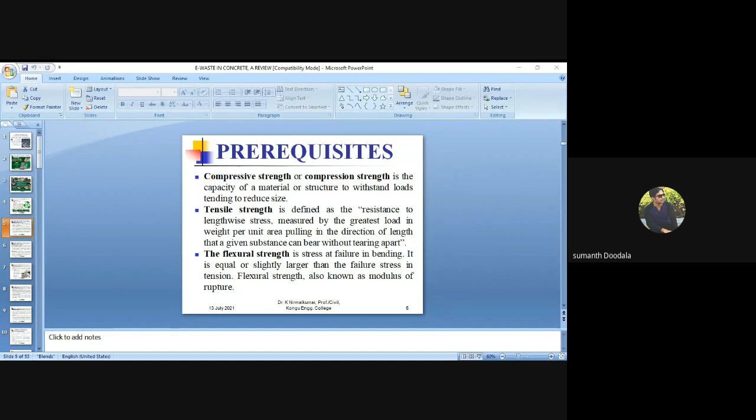Let me ask you a simple question: is concrete a brittle material or a ductile material? Anybody? Brittle, sir. Brittle material.

One more small thing, sir: whether the failure of concrete is sudden or takes place in a gradual mode? We can have some interaction so that it will be easy and lively. How about the failure of a concrete structure, sir? Sudden, in case of plain cement concrete, PCC.

Okay sir, then in RCC it takes time, gradual. And I know the reason why in PCC it is sudden and in RCC it takes some time - it's because of the tensile strength of the concrete, which is weak.

Which is imparting the tensile strength to the concrete, sir? I think one of the participants has given the answer. Let me share it to have some interaction - I'll stop presenting for a moment.

In concrete, as told, PCC will not be having the reinforcement bar, and it immediately fails. Even in this flexural strength test, when conducted without RCC, the failure will be sudden. Whereas if you take the RCC beam, first there will be some bending, then cracks will appear, then the crack will slowly gradually deteriorate, and finally we'll have the failure.

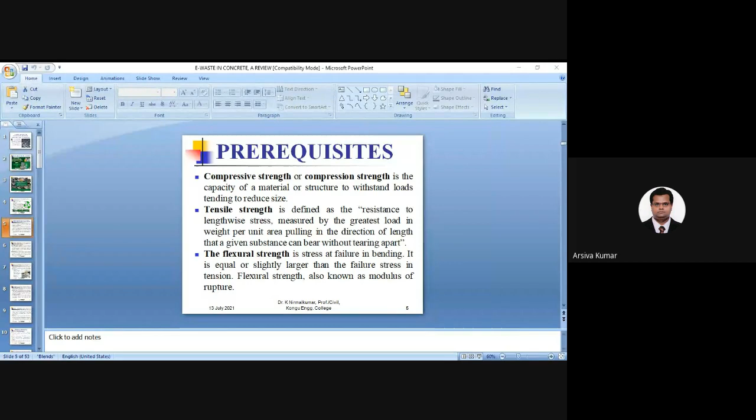So the next one is flexural strength. We have to take care of this flexural strength a little bit, because we are having a direct effect of the e-waste on this flexural strength.

Then comes the water cement ratio, which is the ratio between water and cement. Usually we'll have 0.35 to 0.4, and it will be easily workable. After that, we go for some super plasticizers or admixtures. Since our e-waste has a specific gravity a little different from the conventional coarse and fine aggregate, this water cement ratio has to be adjusted a little bit when using e-waste.

Then comes the admixture. It is nothing but chemical or natural admixture - it is available both as natural admixture and chemical admixture. These admixtures increase the property of all the materials - it will improve the property of the cement, sometimes the coarse aggregate, and the fine aggregate.

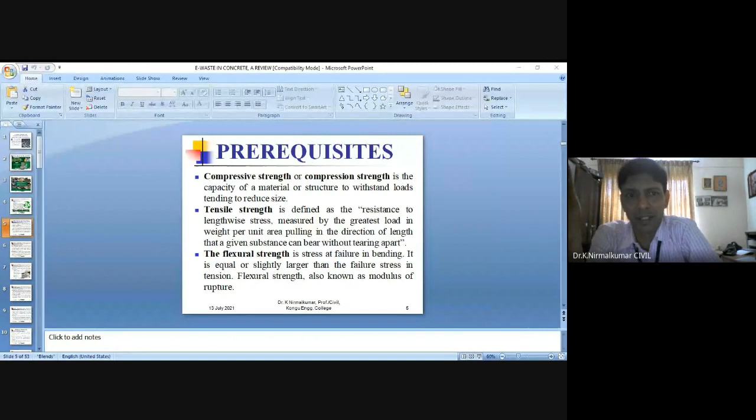Then coming to the durability - we had seen all the basic phenomena, but always we have to see the durability of our concrete, that is the very must thing. A lot of parameters are involved in durability, like chemical attack, acid attack, sulfate attack, then leaching. So all these things come under this durability aspects.

Durability of the concrete is comprised of even the weathering action. I had mentioned only a few things: chemical attack and abrasion. Apart from that, we are having sulfate attack, acid attack, leaching. In leaching, we are having two things - one is leaching of chloride, another one is leaching of sulfate. These are all the various aspects.

Let me ask you, let us have some interaction so that it will not be monotonous. It's an open question - just to have an interaction, I'm asking the question. I'm not checking or keeping an examination, just to have an interaction. What is meant by leaching, sir? Anybody?

Extrusion of water from concrete. Just water or anything else, sir? That is water with cement paste. It is not moisture, sir. Anybody? Leaching?

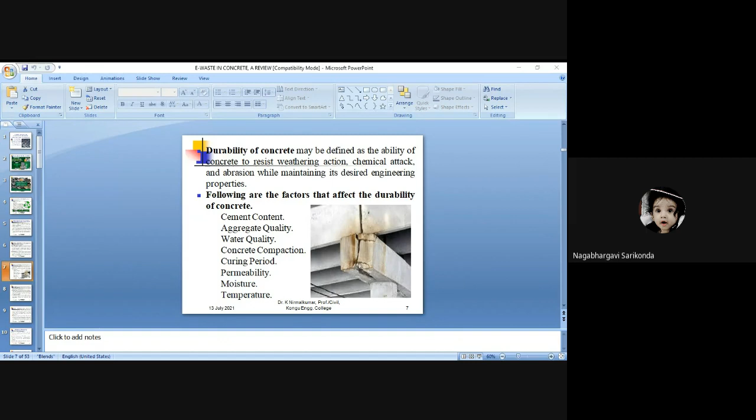Exactly, I don't know the process, sir. But hello, sir. Am I audible? Hello. Yeah, tell me, madam.

Monica, madam, tell me. Leaching happens from the waste which we are dumping, so that the water is... Exactly, madam. Madam, in leaching, what are the main parameters that we are studying? Any idea?

Monica, madam, your answer is okay. In solid waste management, for example, domestic waste and industrial waste are dumped in a site, then the leaching process happens over a long time, and the leaching affects the water level also, and it is very dangerous to human health.

Okay, madam. One more small discussion, madam. When we use this e-waste in concrete and we dismantle the structure and put it on the land, will there be any problem, in your point of view? I think I don't know actually the answer.

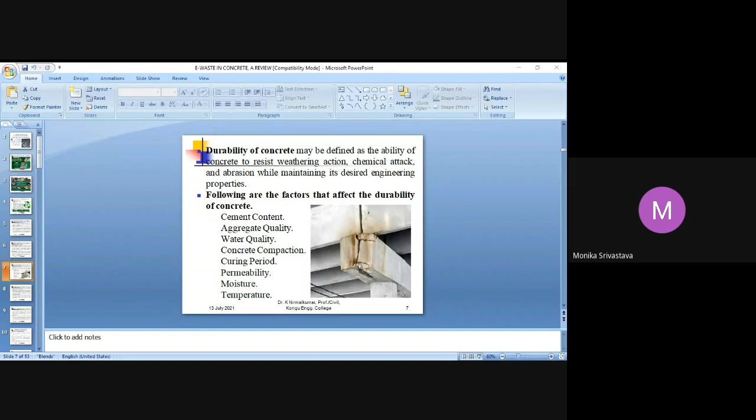Okay, sir. Actually, in durability, for whatever the structure, whatever the experimental work we are doing, we have to see what will happen in the long term context. Whatever the experiment, this main thing many people will not do.

Only in the developed countries, if you see the research work taking place in the States or the western world, whatever research results they get, they go for durability: after 50 or 100 years, after the lifetime of the structure, if we dismantle it and put it on soil or dump it in some dump yard, will there be any leaching? So in durability studies, leaching plays a vital role.

And for your information, these are value added informations. Leaching of sulfate and leaching of chloride, these two things are highly toxic substances to the soil characteristics.

Even in the most developed countries, before the coming of e-waste, in Dubai and Saudi countries, they used the waste residue coming from the petroleum industry in the concrete. They did the research work, showed the results were good, and proved it is good.

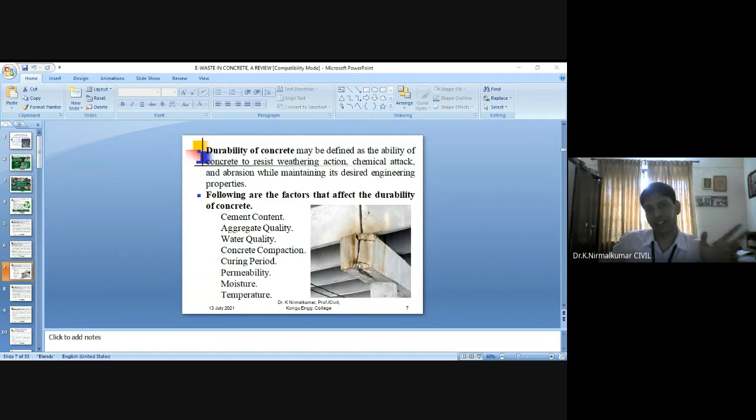So durability is the ability of concrete to resist weathering action, chemical attack, acid attack, sulfate attack, etc., while maintaining the desired engineering properties. And they have given the factors. Cement content, no problem. Then comes the aggregate quality.

Here, the aggregate quality is our e-waste. In the coming slides, we'll see the chemical composition of those e-wastes, and at that point you will know the importance of all these things. So aggregate quality plays a vital role in durability. As usual, water quality, then compaction.

Yes, sir. A very important factor when we use e-waste as a replacement for either the coarse aggregate or the fine aggregate: compaction is a bit of a big issue. Then comes the curing period. Obviously, the curing period will vary a little bit. But in our research work, we cured it for just 28 days as usual.

Then permeability, I hope you know it is the ability of the concrete to allow the water to pass through it. Then moisture content and the temperature. So all these are the important factors. And if you see all these parameters which influence the durability, they have a direct relationship with our e-waste. So we have to know all this information.

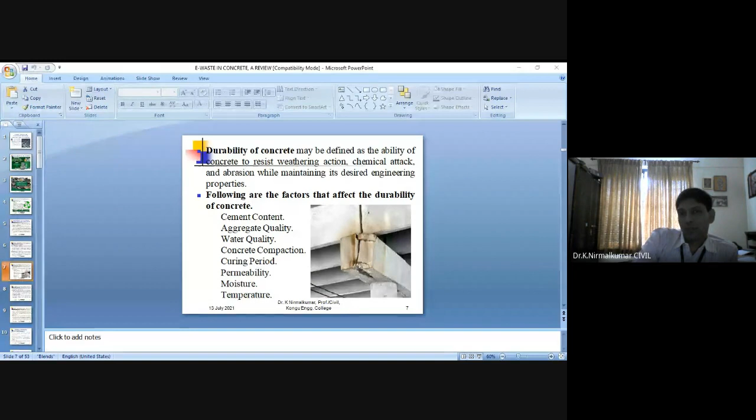Then permeability, it is the measure of the amount of water that passes through the concrete. Then compaction, as I have told you earlier, the compaction should be a better one. Sometimes if it is not compacted, we will be having the honeycomb structure. So with this e-waste, sometimes we face the problem of compaction also. Usually we do this compaction with the help of the compacting rod. And if you are doing research work with e-waste and have a vibrator, it is better. So we used the vibrator.

Then honeycombing: due to the low water cement ratio, we'll be having the honeycombness. The structure will not be even. We'll be having small breakage in the concrete, that is known as the honeycomb.

Then comes the concrete segregation. As I have told you earlier, the workability is a little bit challenging issue while using this e-waste. So sometimes if we go for SP, if we use a little bit more amount of SP, then also we'll be having segregation and bleeding. Both these problems we will often encounter while doing the trial mixes. And exclusively in our e-waste, since its specific gravity is a little bit different from the other coarse aggregate, we encounter this problem of segregation and bleeding.

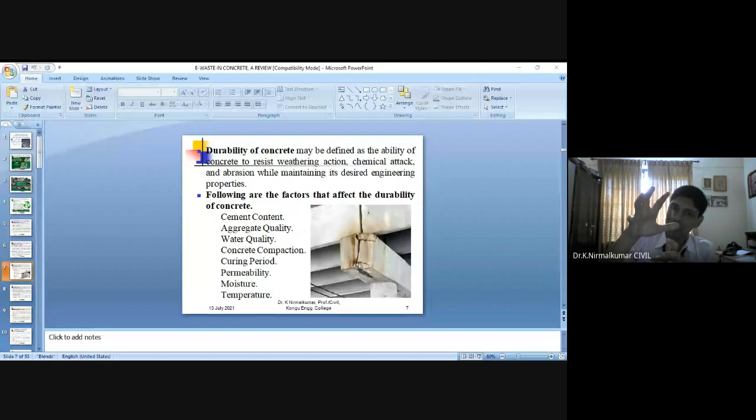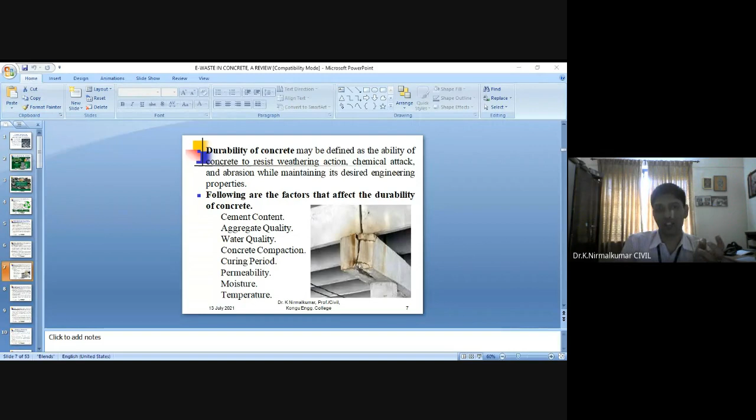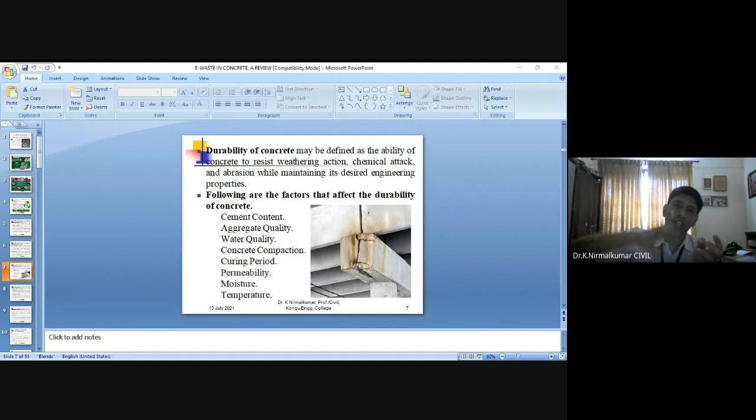Let me give you one more thing: this particular durability. Always when you are doing research, be very careful with the durability, whether you are adding some admixtures to counteract some encountered difficulty. So please have it in mind. You have to have the durability. Why I am telling this is, if you are submitting a paper to a very good journal, an Elsevier journal, they will look at how the durability is. They will see the long term. So we have to take into account this durability while doing the research.

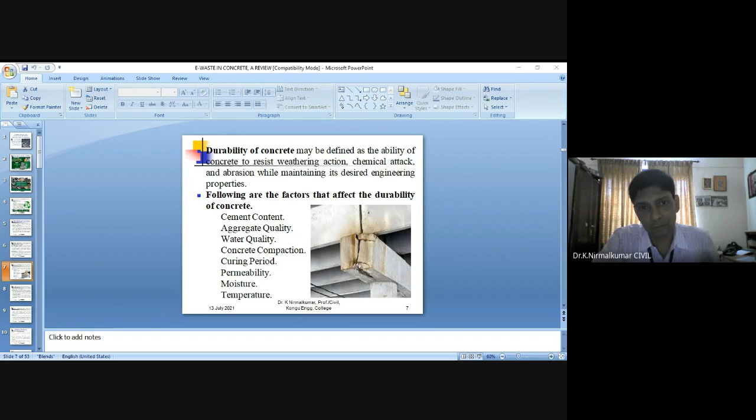Okay, sir. If there is a doubt, you can ask me. Shall I proceed, sir? Sir, any queries for anybody? The prerequisites, sir? No, sir. Okay, sir.

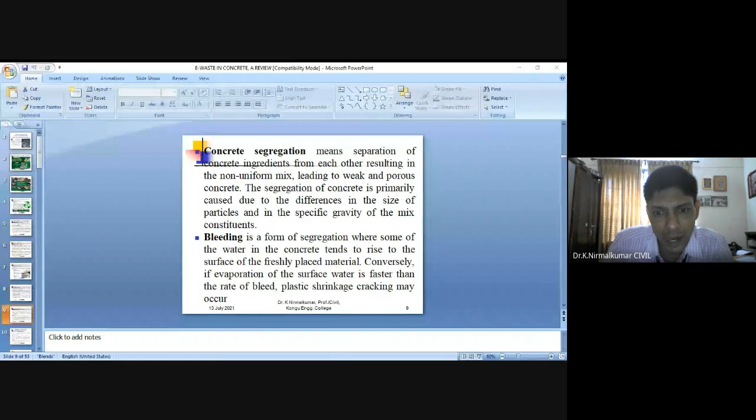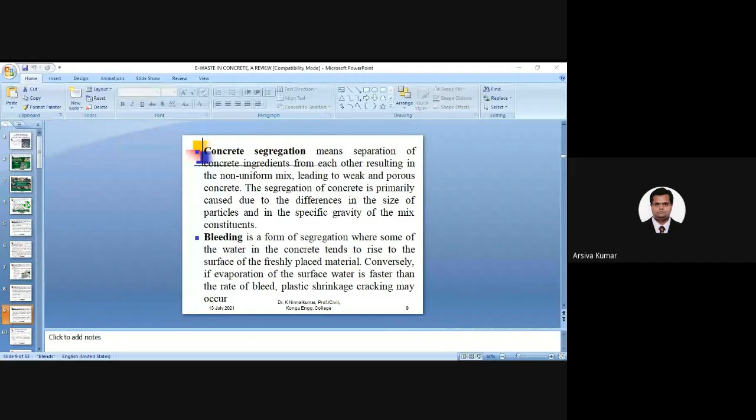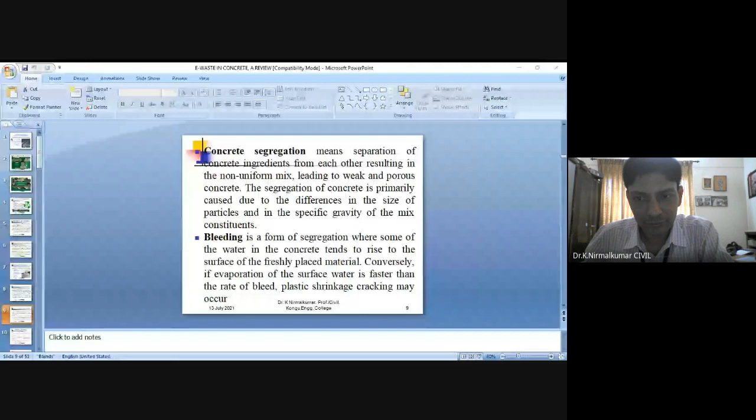Sir, request to make a slideshow, because the screen is a little small. Now, sir? Just press F5. Please check it, sir. Now also it is in the same view. It's not in the slide. Just press F5, sir. Good morning, sir. Slideshow, sir. Your screen is not shared now. I stopped sharing; now I have shared it. Is the screen visible, sir? Is the PPT visible, sir?

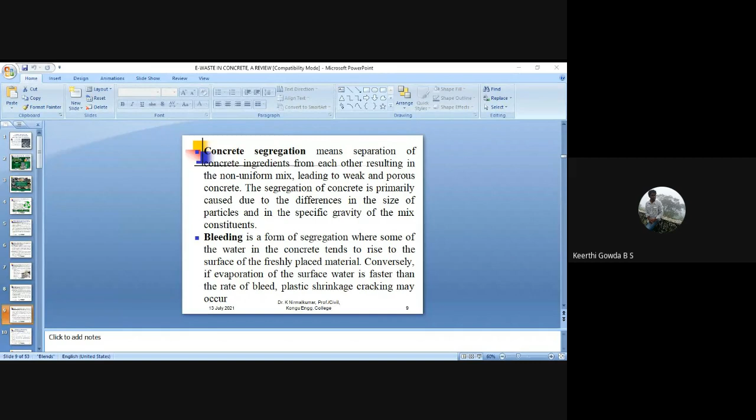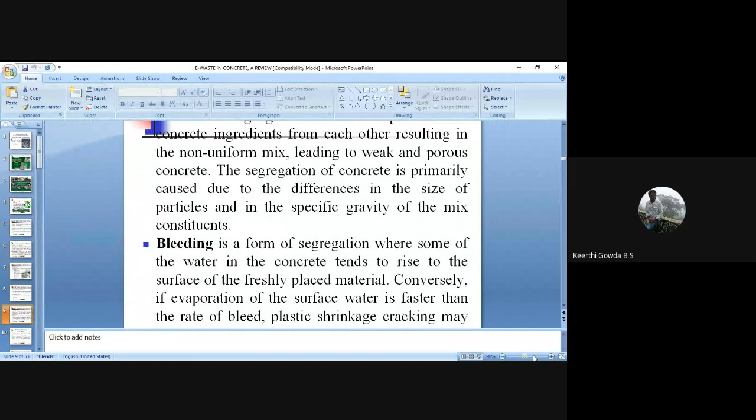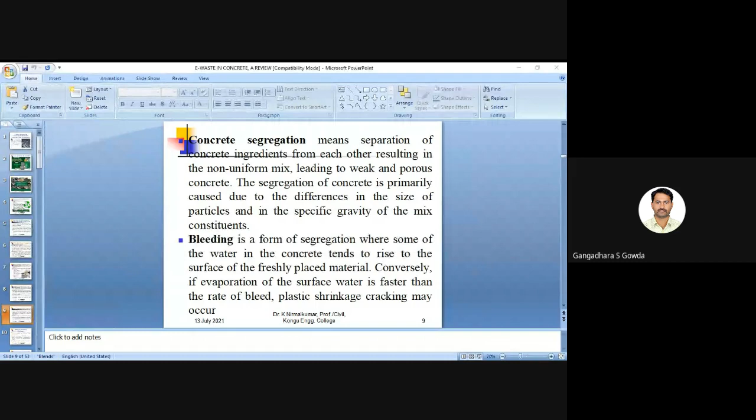Yes, sir. The screen is visible, but change it to PPT presentation. In the right side bottom, it is less than 50%. What shall I do, sir? Just maximize that. Left side of it, there is one slideshow button, just press it. Otherwise, press F5. Is it okay, sir? No, it is just maximizing, but it is not getting full screen. Just one minute, wait, sir. I'll get some support. Just a minute, sir.

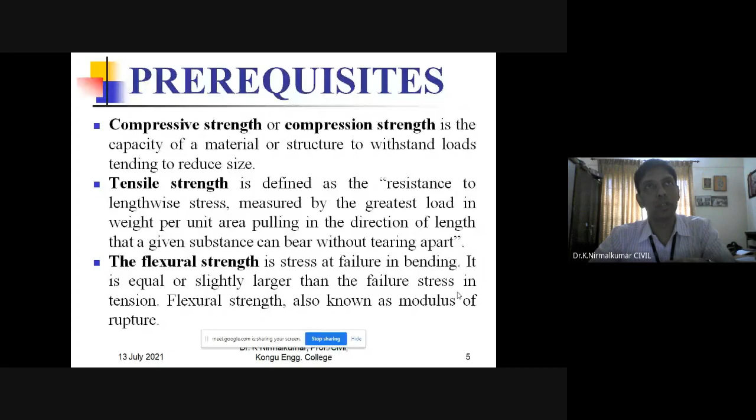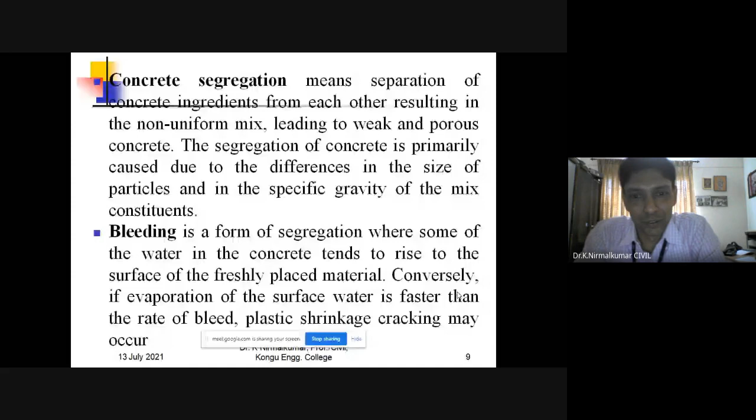No problem, sir. You continue. Now it's okay. Okay, sir. So sorry for a little bit of hindrance.

So now let us go on to our presentation. So first, let us see what is meant by e-waste. E-waste, I hope you know, after whatever things we buy, I think we can take our mobile phones. After 3 or 4 years, its useful life period, we are replacing the mobile.

Sometimes, if you are buying through Amazon, we are giving the mobile phone, and those people are either refurbishing it, or sometimes they make it as e-waste. So after the useful life, all are e-waste.

Many people attending may not know what is meant by VCRs, VCPs. VCRs means video cassette recorders, video cassette players. These were very famous till the 1990s. Before 2000, these things were very, very famous.

Then televisions. Earlier we had televisions very, very big in size. Now we have replaced the big television with a thinner one. Then even the thinner one was replaced with LCD, and now a few people have replaced it with LED. So these are all e-waste. This is why we are getting e-waste.

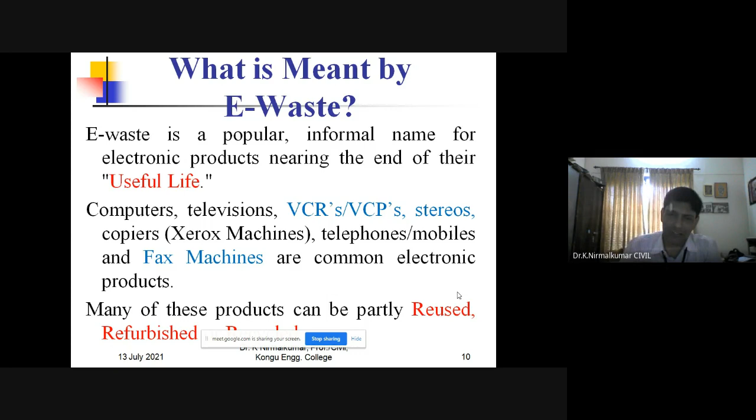Even at my age of 43, two to three times we had replaced our things: televisions, mixies, fridges, ACs, telephones, and in fact we can say mobile phones. From 2002 or 2003 we started using the mobile phone. Right now, I think I have replaced around 7 to 10 sets.

Just imagine, if this much e-waste is getting generated in one single house, imagine how much it will be in a small town, in a country, and from a world perspective. It is a lot. In the forthcoming slides, we'll be having that information. So these are all the e-waste, and this is general information.

As a technical person, we have to see that each e-waste will be of different characteristics. For example, if you take the TV, it has different e-waste characteristics. If you take a fridge, it has different e-waste characteristics. If you take the washing machine, or anything, it has different characteristics. The characteristics of e-waste are not homogeneous. They are purely heterogeneous.

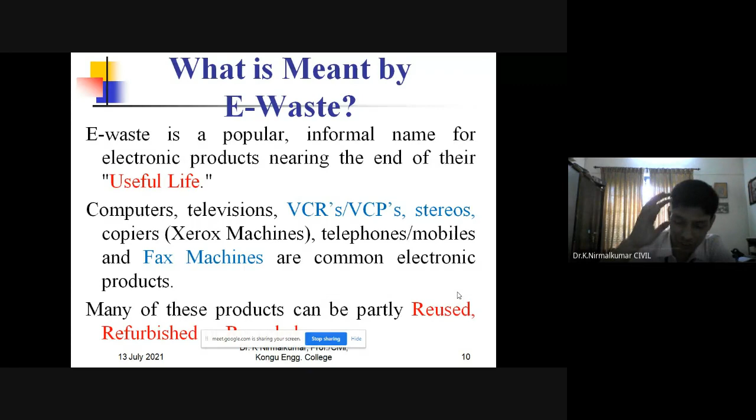So as a technical person, and moreover as a civil engineer, we should have this in our mind. Now, how is this e-waste formed? Just because of the technological revolution and industrial revolution. I hope most of us have seen this in our houses. A few professors will be 50 plus or 60 plus. In their lifespan, over these three decades, they would have experienced a lot of industrial and technological revolution.

For a small example, let me give you our mobile phones. In India, mobile phones were introduced in 1995 and 96, and in 1996 the mobile phones were this much in size. A person having a mobile phone was considered prestigious. Only very rich people used mobile phones, and they were very big, like the size of a brick. Now, if you see, they are very, very small.

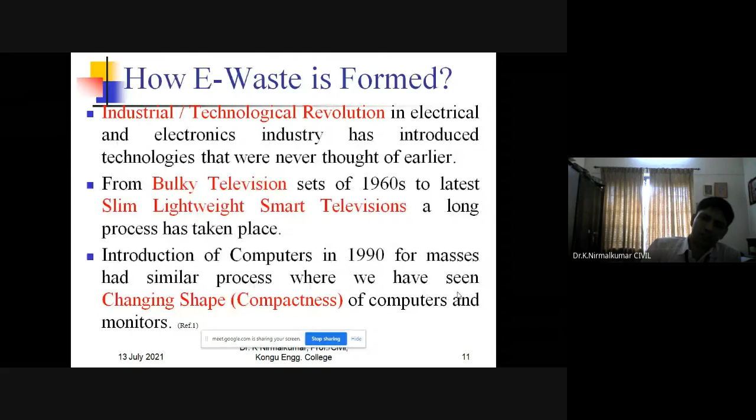A few people have iPhones, very costly phones. Just because of the technological revolution, more e-waste is formed. And due to mass replacement of all the things, starting from television to computers, this e-waste is getting formed.

Then these are the mobile phones, Kindles, and e-diaries. In the 90s and 2000s, e-diaries were very, very famous. There was a craze for e-diaries. The youngsters, both boys and girls, would have e-diaries to note down their day-to-day schedule and to keep phone numbers. In earlier days we had only phone numbers. And Kindles, just 5-6 years back, were more in the market.

Kindle is an equipment used to study. We can upload things in a PDF. For example, if you're going by a train, a bus, a car or a flight, in order to pass time, we'll be having the Kindle. And Kindle, for your information, is small in size. It can upload up to 10 GB or 20 GB of PDF files or Word document files.

We can upload the things. It's almost like a mini laptop, but no processor will be there. It's like an iPod, or like a computer, but it's just a reading tool. These Kindles are also becoming e-waste, because after a certain point of time people stop using the Kindles and go for new Kindles, and computers, laptops, mobiles, everything, just due to its capacity. All these things are becoming e-waste.

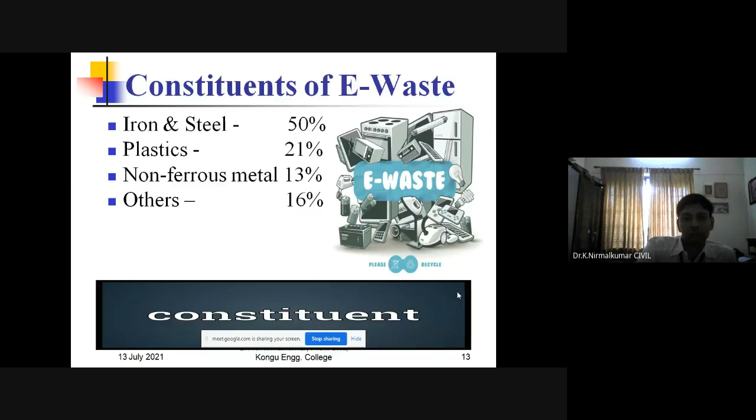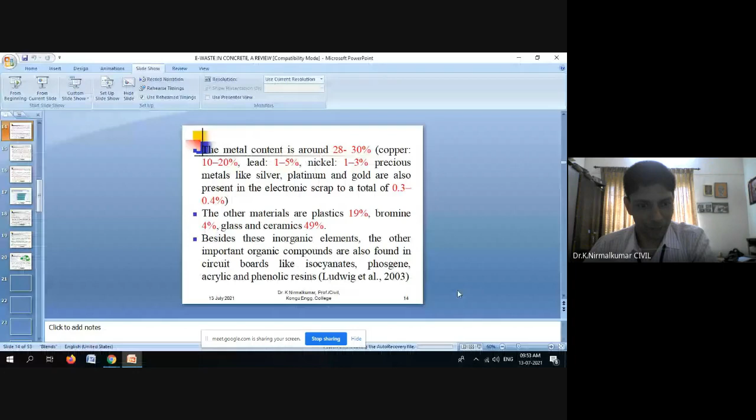Sirs, madams, will the chemical composition be the same for all the e-waste, or will it be different? Anybody? I think it will be same. Varies, I think, sir. Magesh, louder? Varies, I think, sir. It is same. It's different for all. Same. How is it same?

Let us have a discussion. We have mobile phones and we have televisions. In television, we go for LED screens, LCD, cathode ray tubes, CRT, etc. But in mobile phones we don't have these. Will the chemical composition be the same? No, it is not same for all. Yes, it is not same for all.

At this juncture, let me tell you one more thing. If you are doing research work, first we have to have a clear-cut idea which e-waste we are going to use for our experimental work, whether we are using television sets or refrigerators. Because in refrigerators we have many organic compounds, sometimes the coolant, so the chemical composition will be different.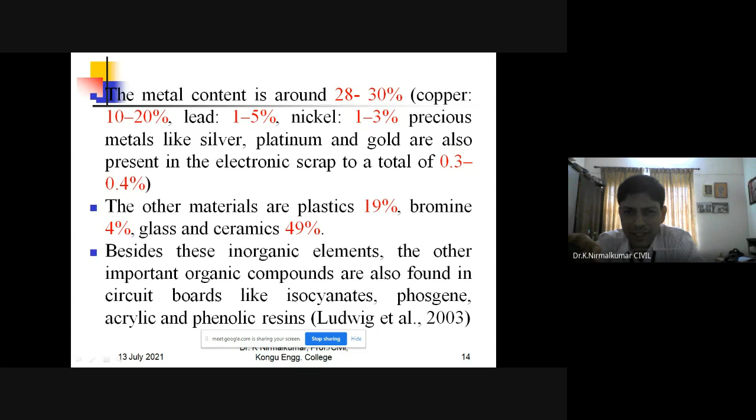So these contents, they have given generally, it may vary from one component to other component.

Now, the scenario of e-waste disposal. Mostly what we are doing is going for landfills, and even in landfills, we are having a leachability problem. This e-waste, we cannot just put it on the land like that. We have to go for proper disposal and reuse. While disposing, we have to have a proper skilled person, and the supervision should be a strict one, whether we are going for landfill or incineration, anything. Our supervision should be a better one. The underground water quality, there is 100% chance of getting affected. Even human health, even animal health, all these things are under the mercy of this e-waste. So we have to be very, very careful.

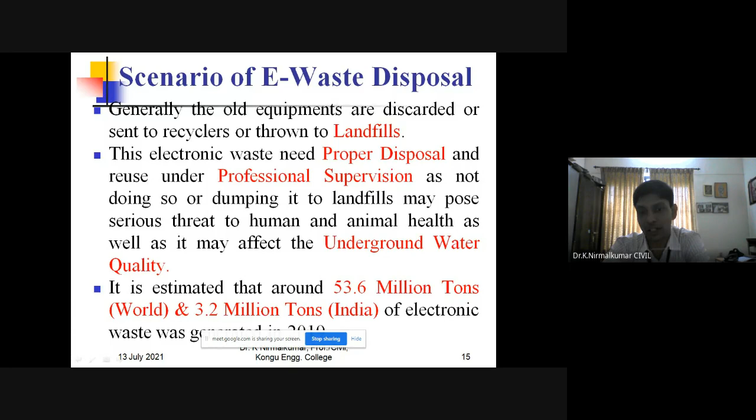Another important data point: it's around 53.6 million tons worldwide. And in India, it is through 3.2 million tons of electronic waste that are generated.

In developing countries, we are not having proper regulation to dispose this e-waste, and due to that we are having harmful impacts. It is polluting the environment, and as a consequence, even our entire ecological cycle is being affected.

I want to give you an example at this juncture. Have you all seen the Singham movie? I think in Tamil Nadu it was very famous, I don't know how about in Telugu also. Have you seen Singham movie? I think yes sir, Singham 2. Singham 2 or Singham 3? Singham 3, I think so. Am I right? Singham 3. Yes sir, Singham 3, yes sir.

While seeing that movie, we think it is only an imagination part, just for entertainment, where they show importing e-waste and medi-waste from Australia and dumping it in Hyderabad, nearby the Visakhapatnam area. But it is not just a story, only it has not happened in India. If you take third world countries, we call those Ethiopia, Somalia, all these African countries, third world, underdeveloped peoples with no awareness at all. They don't know, and for your information, in a few African countries, they are still not exposed to internet, not exposed to electricity, not even exposed to mobile phones. Even TV is not available in a few African countries.

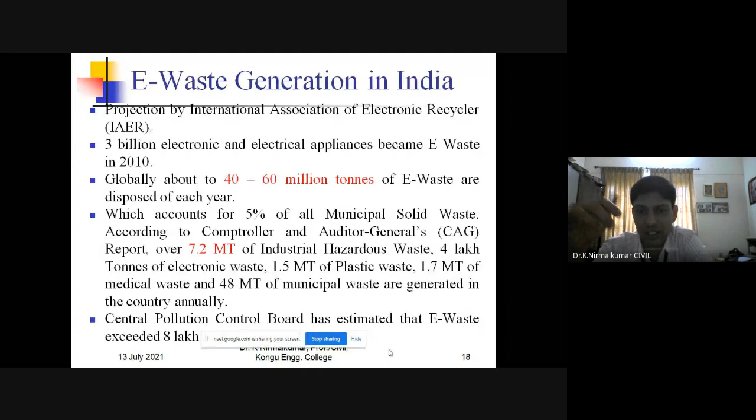And the Central Pollution Control Board, CPCB, estimated that we are having around more than 8 lakh tons. They have given an estimate that we are generating e-waste of about 8 lakh tons.

There are 10 states in our country which contribute to 70% of the total e-waste, and 65 cities generate more than 60% of the total e-waste in India. These are all the top cosmopolitan cities like Mumbai, Delhi, Bengaluru, Chennai, Ahmedabad, Hyderabad. All these 65 cities contribute around 60% of the e-waste.

Bihar is the least generator of e-waste. In Bihar, it is a little bit an underdeveloped state. For your information, even in Bihar, in few villages, they don't know about electricity, or they don't have awareness of internet. So it is still a developing state in our country, so the generation of e-waste is very, very less.

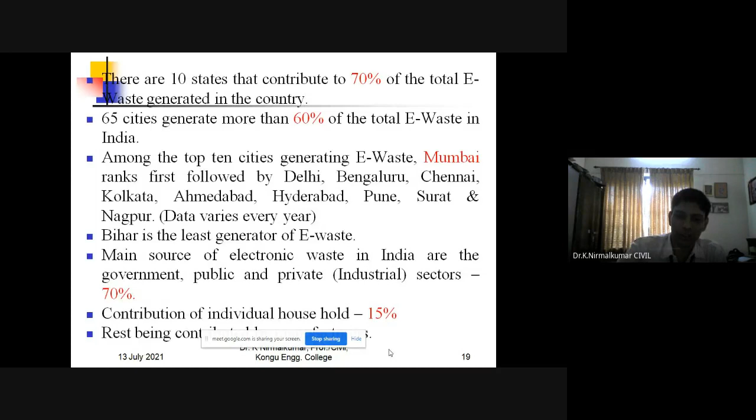And the main sources of electronic waste in India are the government, public and private, and industrial sector. Household contributes around 15%.

E-waste in India: television 68%, desktops, that is the computers, 27%, imports 2%, mobile phone 1%, others 2%. So the television and the desktop contribute the major percentage.

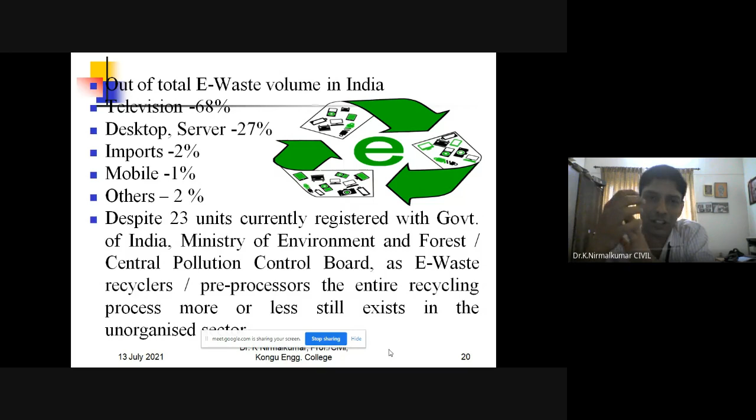So here, as a technical person, if you want to do research work in e-waste concrete, it is better to go for taking televisions and computers, as it will be very easy for our research work. My UG students did it with the help of televisions, because they got televisions for a very cheap rate in a television shop. They just broke it and powdered it, and used it for the concrete.

E-waste economy in the unorganized sector - this is just general information. More than 90% of the e-waste generated in the country ends up in the unorganized market for recycling and disposal.

This is a very, very great danger to our country. Mostly in few metropolitan cities like Mumbai, and in Gujarat, Ahmedabad and Chennai, what they do is simply put the e-waste in dumping areas, so-called municipal dumping yards. They just put it there, and even the laborers who are handling this thing are not properly using even gloves. They are not using them.

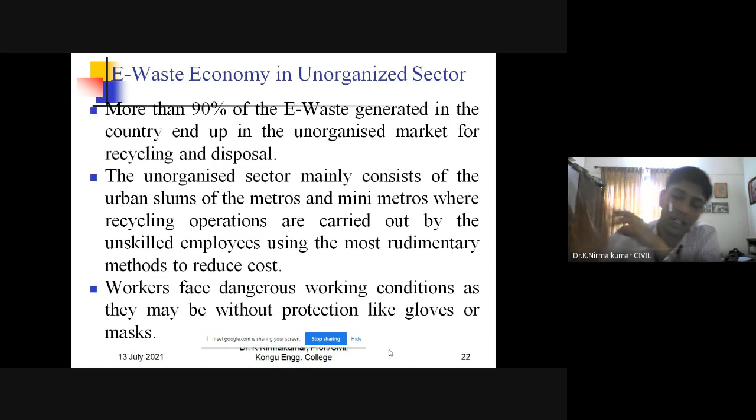They are not using gloves or proper face masks, and all these things are very dangerous. For our information, while doing our experiment, if you are using e-waste in concrete, please wear gloves and be very careful. Even you have to instruct the students to be very, very careful.

These methods of disposal of e-waste usually include landfill, mostly going for burial, which is very dangerous. Mostly if you go for landfill, you will be having leaching properties. Not only sulfate and chloride will be having leaching property, but all kinds of leachings, including nitrate, etc.

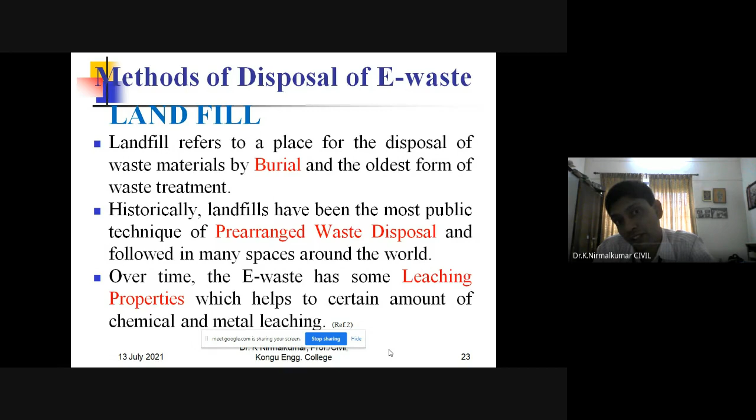While burning also, we are having a lot of issues. Even while doing incineration, toxic substances will be evolved. For your information, sometimes you are having organic matter, isocyanates. If isocyanates are burned, it may lead to problems for respiration, and sometimes even death may occur. Sometimes they are converting the e-waste into ash.

That ash also, sometimes they are using in the fine aggregates, by replacing the fine aggregates.

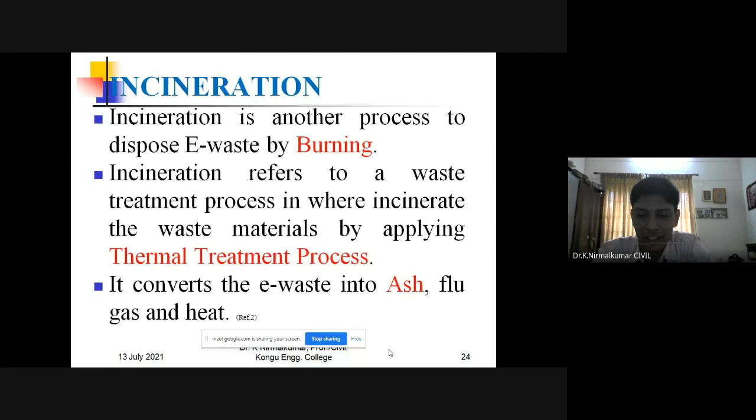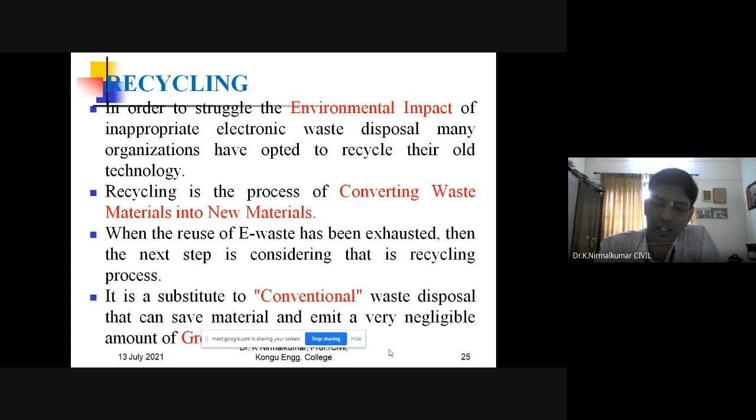Then comes the recycling. Recycling, I think, is only a small part. We cannot go for larger recycling, just a smaller part. If you go much more for recycling, then once again, up to some extent, we can use it for recycling, but after a particular point, we cannot use it for the same objective. So this is also not a proper disposal.

Then reuse. I think mostly nowadays we have stopped using second-hand things, even second-hand products. In India, as a developing country, we are still going for new bikes and new cars. Only a very few percentage nowadays go for second-hand use. Even this kind of e-waste, there is no big market for reuse, and these are all the effects of e-waste disposal.

Long-term harmful effects: we have more than 60 different types of metals, including mercury, cadmium, and lead. All these things are present, so the Indian government is taking a lot of mechanisms, formulating a lot of rules and regulations to curb e-waste.

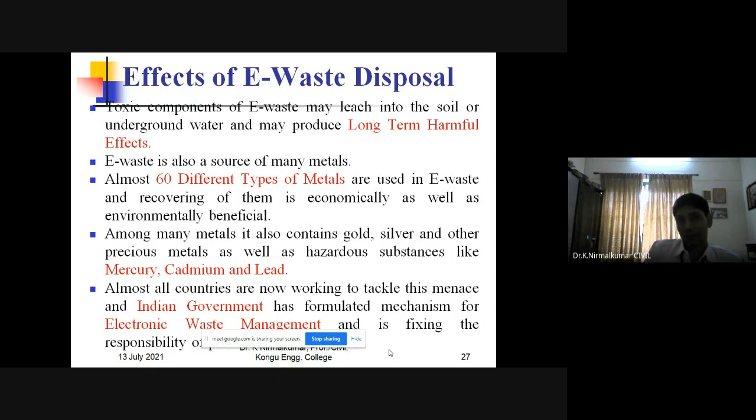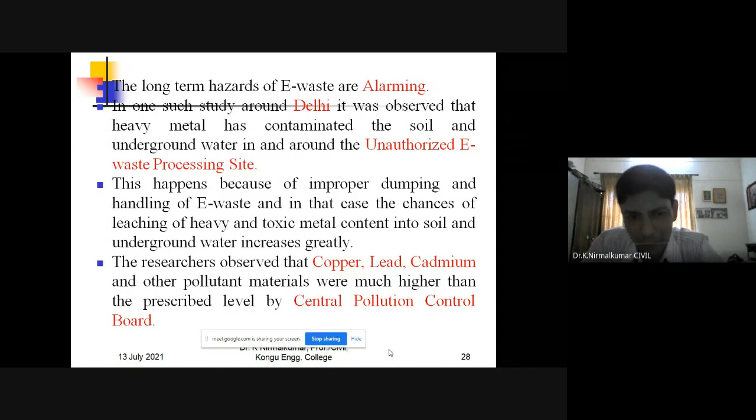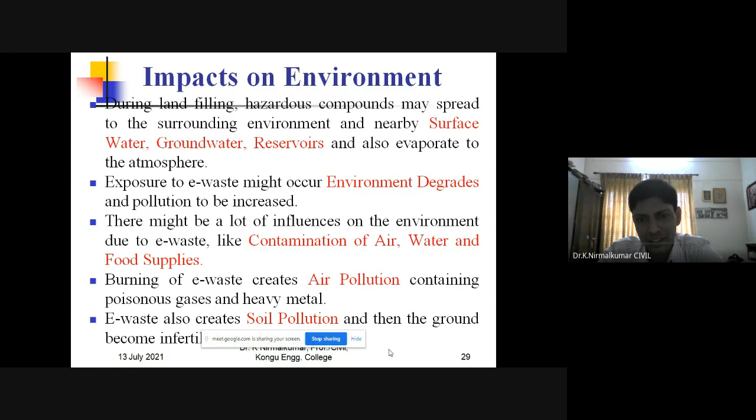At one point of time, we may have a chance of exporting e-waste to some third underdeveloped countries; there may be some such possibilities. Even in India, we are having an alarming situation, not a very successful one, and these are all the various impacts on the environment. Surface water, groundwater, reservoirs, all these are getting contaminated, which is a big problem both to the environment and to the soil.

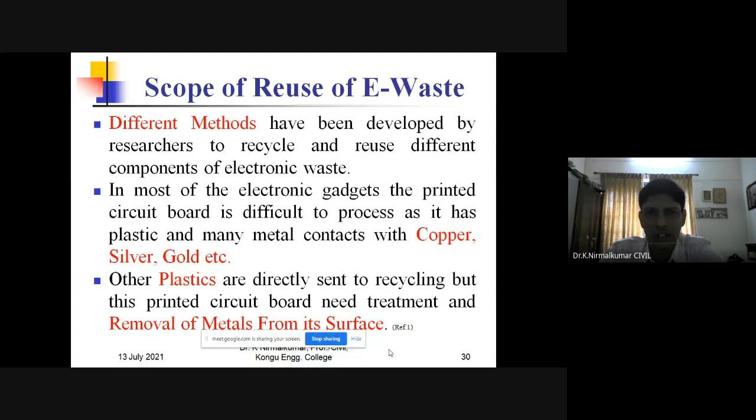Reusing, yes, we have a little scope, but not a big scope is available. I think we can go to the PCBs now.

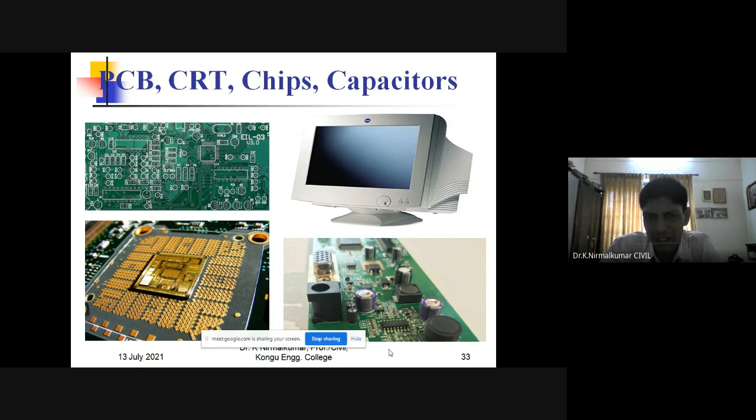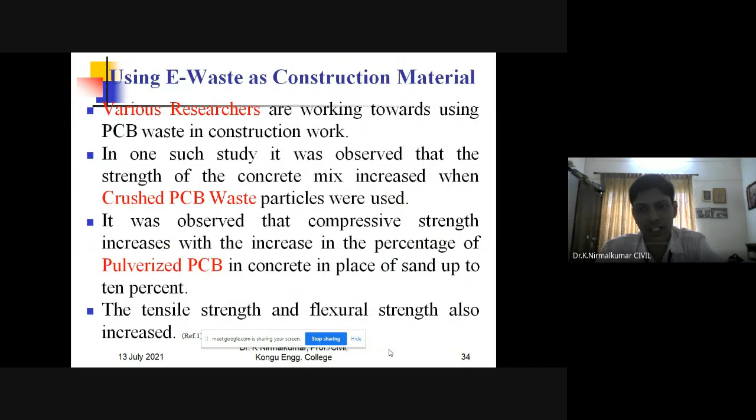Here, if you see, I repeat: if you go for experimental work, just choose any one. Either if you want to use a computer, just use the computer, or if you go for capacitors or TVs, just use any one. You should not combine all the things. Now let us see the review before getting into that.

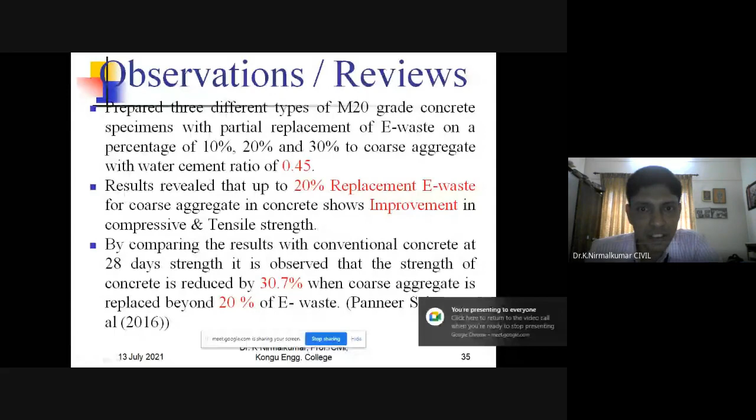Okay, sir. Now I think we are going to see the experimental results. So this particular experiment was carried out by Panneer Selvam et al. in 2016. What he did is he prepared different types of M20 grade concrete specimens with partial replacement of coarse aggregate by e-waste at 10%, 20%, and 30%. Here he had a water cement ratio of 0.45, and he had given the results.

Here he had given the results up to 20% replacement of coarse aggregate by e-waste in concrete. It shows improvement in the compressive and tensile strength. Just because he had replaced only 20%, that was not a big issue. But if we go for a higher percentage, we'll be having some issues.

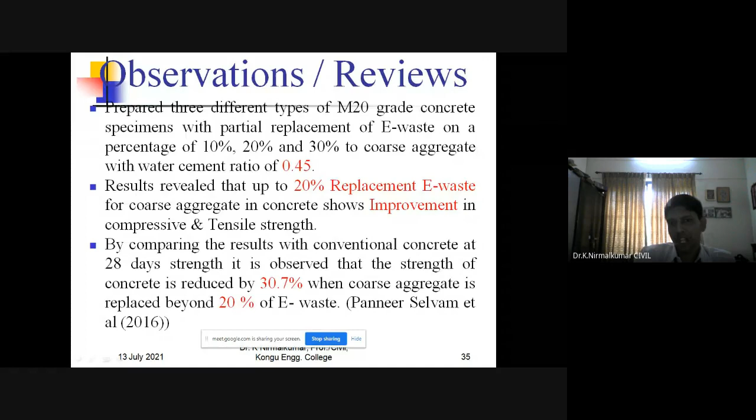Comparing the results with conventional concrete at 28 days, it was observed that the strength of the concrete is reduced by 30.7% when coarse aggregate is replaced beyond 20%. So he had optimized up to 20%. He still carried out the experiment beyond that, but he recommended the usage of e-waste replacement in concrete up to 20%. And here he had given the results.

Okay, so this is conventional. This particular one is made with M25 grade of concrete, and it was done in 2015 by Kanniyappan et al. They used 10%, 20%, and 30% e-waste concrete for 7, 14, and 28 days. The blue line indicates the conventional concrete, where there is zero replacement of e-waste, for M25 grade of concrete.

At the seventh day test, 10% e-waste is a little bit more than the conventional concrete, and 20% has more compressive strength than the conventional one. At 30%, the concrete strength is getting decreased, and it is a little bit less than that of the conventional concrete.

So his inference for the seventh day compressive strength is that beyond 20%, the compressive strength is getting decreased. Almost the same thing is observed in the 14-day and 28-day strength. We have to look a little at this 28 days compressive strength. I think this particular result is good.

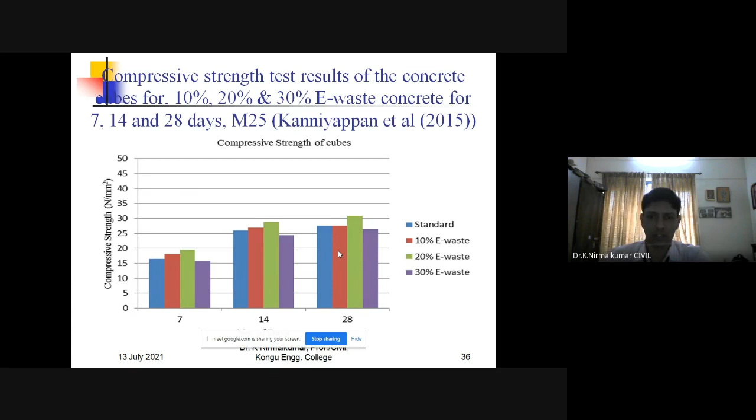Up to 20%, he is having more than 30 Newton per mm square for M25 grade of concrete, around 31 or 32 Newton per mm square. So as per his observation, he has used up to 20%, beyond which there is a reduction in the strength. Then the same Kanniyappan et al. studied the tensile strength.

Of course, the tensile strength will always be less than the compressive strength. If you see the tensile strength, I think it is a good observation. Let us discuss only the 28 days. The conventional concrete is around 6 Newton per mm square, and 10% is something around 6.2 or 6.3 Newton per mm square.

But if you see the 20% replacement, it is around 6.5 Newton per mm square, or a little more than 6.5 Newton per mm square. And in comparison with the compressive strength, this tensile strength result is better.

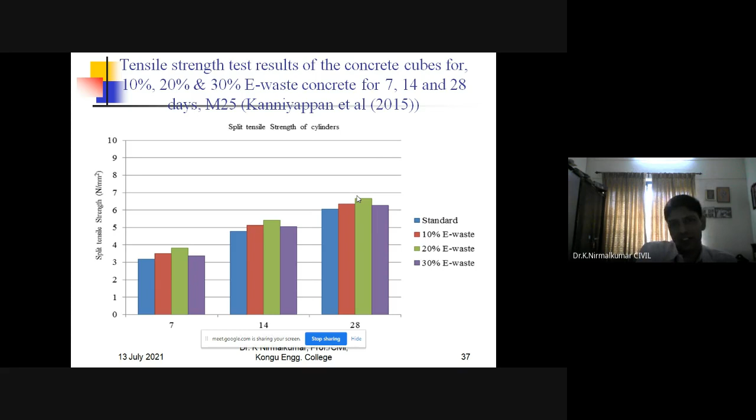Maybe due to the chemical content, or the inorganic content, like a small amount of copper or a small amount of steel, the tensile property may have improved a little bit. So compared to the compressive strength, the tensile strength is better as per his inference.

Then he had given the inference for the flexural strength also. Here the flexural strength is also a good one. Let us discuss only the 28 days strength. At 28 days, the conventional is around 5 Newton per mm square, whereas the 20% and 10% replacement are a little bit more than the conventional one, around more than 5.3 Newton per mm square.

So here, I think he did it for the slabs. Here he had a comparatively good result, because we always have to compare with the conventional one.

So with respect to the conventional one, the behavior is a good one. So Kanniyappan, from all his 3 experiments, experimented on the compressive strength, the tensile strength, and the flexural strength. These are all the observations he had given. So compared to the compressive strength, the tensile strength and flexural strength are good, and in tensile strength we have a significant improvement compared to the conventional one.

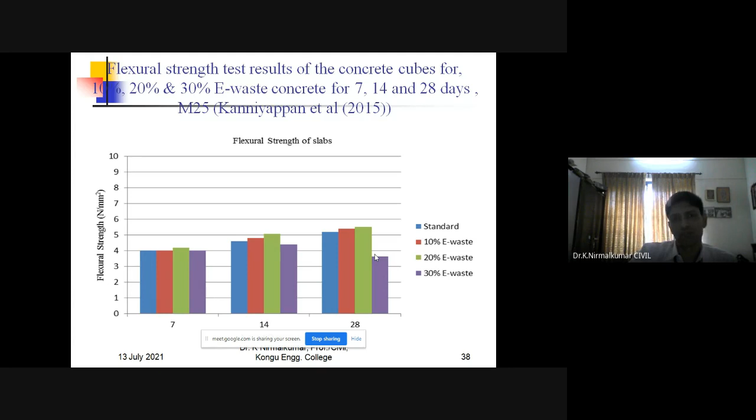I think these kinds of things we can use for RCC areas, or for some specific structures where more tensile strength is required. So these are all the inferences we observed from Kanniyappan. Then Amiya Akram et al., in 2015, did the experiment.

They determined the compressive strength and split tensile strength, and the mix percentage was varied at 5, 10, and 15%, and compared with the conventional one. He used 10% fly ash. Fly ash is a pozzolanic material, and he did it for M20 grade of concrete.

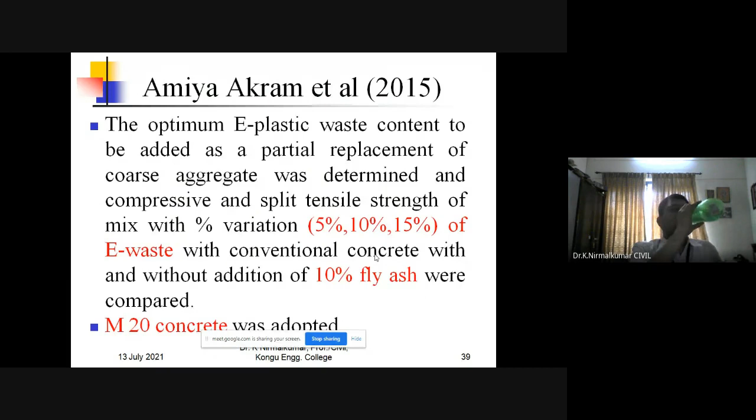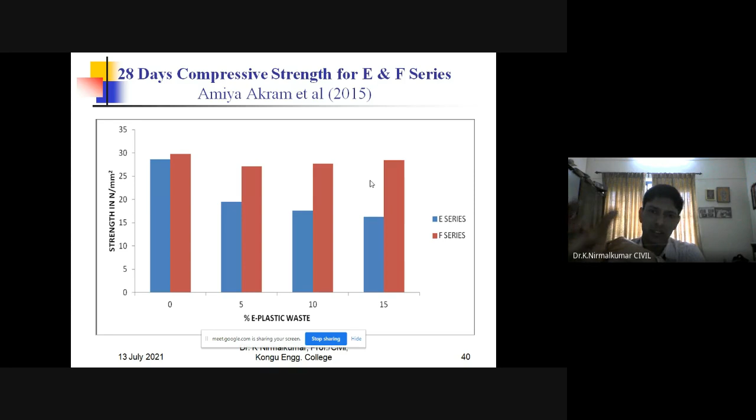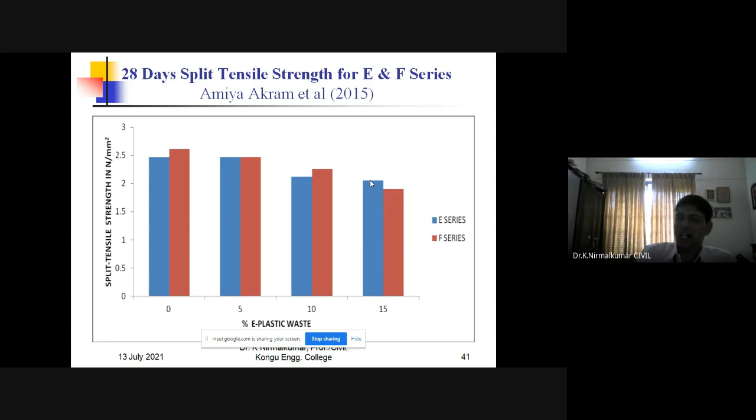I think here we have a different scenario compared with Kaniyappan et al. Here the tensile strength in the initial days is okay. Up to 10% it is okay, but beyond 10%, at 15%, the tensile strength is much lower. This may be because the materials taken by Akram et al. and Kaniyappan et al. may be different. That is the main reason we have this. Based on these kinds of inferences, we have to choose the proper materials for the replacement.

Then he observed that with 10% fly ash added, results comparable to the control specimen were obtained even for 15% proportion of e-waste. Replacement with this waste in concrete reduces the requirement of conventional coarse aggregate, and as a result natural resources can be conserved. The main thing we have to know is the specific gravity. The specific gravity of e-plastic is much less. This is a very big issue.

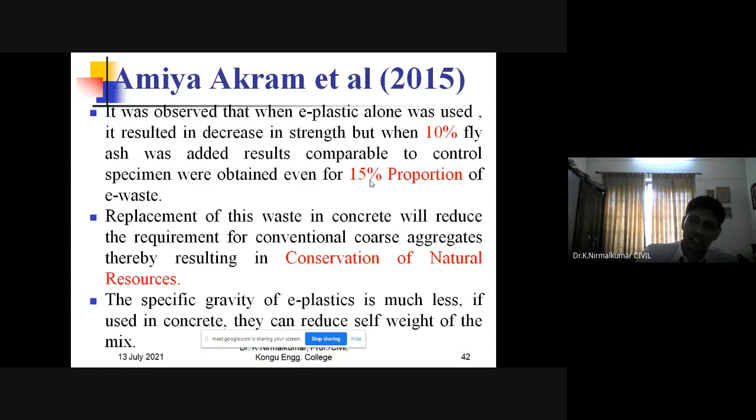So to counteract this, we have to go for some research work to determine a proper dosage of admixture or a proper chemical to improve the specific gravity. So as far as 15 or 20% is considered, it is good. Moreover, they added fly ash. Fly ash is also a good pozzolanic material, and it may be one of the reasons for the slightly better strength.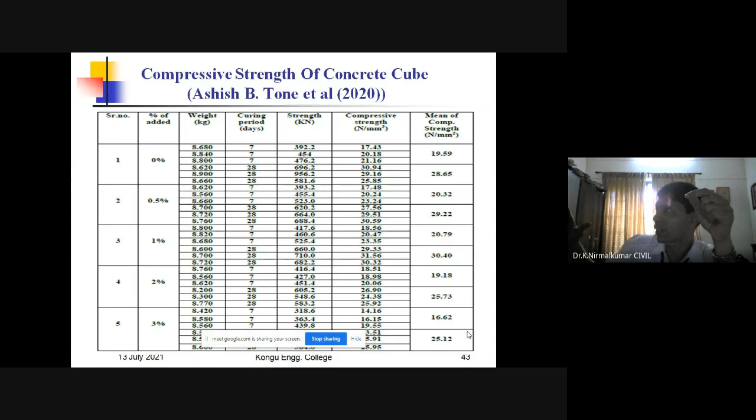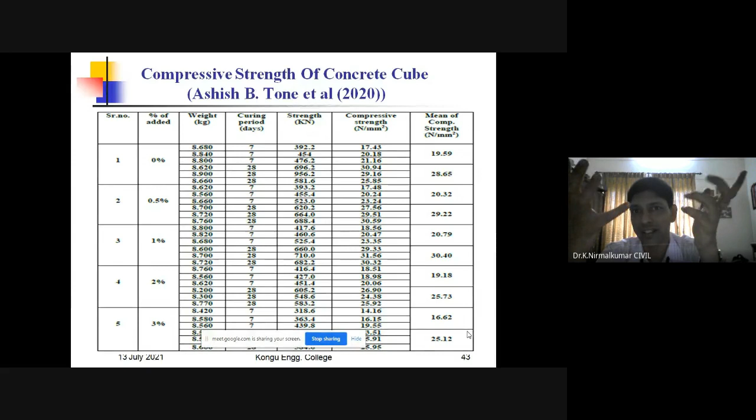That is the reason I have told you. The main thing is what e-waste they are using for the experiment. For example, I'm giving you a hypothetical condition. If you use television, in television you have a lot of empty spaces. The density and the strength will be very, very low. But when you go for a mixie or a washing machine, the body is a little bit stronger. The entire property will be varying. So based on that, the strength may decrease or increase. That is the main reason.

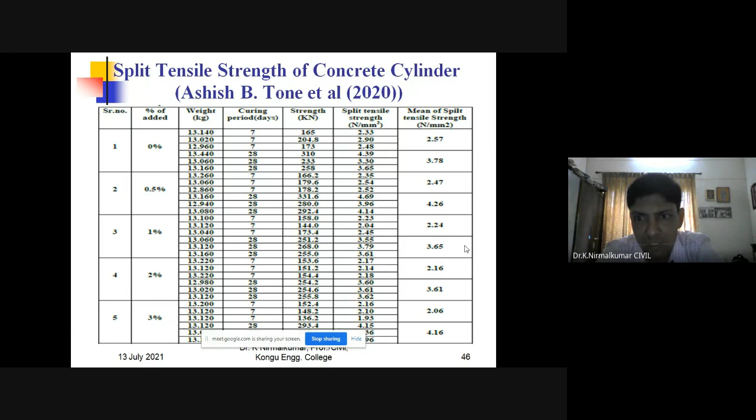0.5%, it is better. 0.5% we are getting 4.26 Newton per mm square. When we go for the paver blocks, I think the paver blocks minimum will be 2.5 Newton per mm square or 3 Newton per mm square. If it is that, then it is a good result. Even this 2.5 or 3 can resist 5 tons of lorry or 8 tons of buses, up to 8 to 10 tons. So if we are constructing, then we can go for the 15% replacement. Okay, 15%.

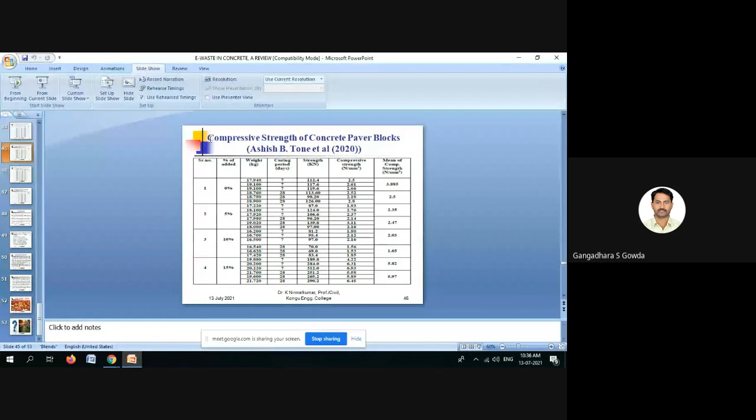Nirmal Kumar sir, your mic is muted. Sir, Nirmal Kumar sir, are you speaking? Yes, sir. Am I audible right now, sir? Okay, sir. Thank you. Just 2 minutes before, a blank came, and information came that somebody had muted the mic, sir. Unknowingly. Oh, okay, sir. Thank you, sir.

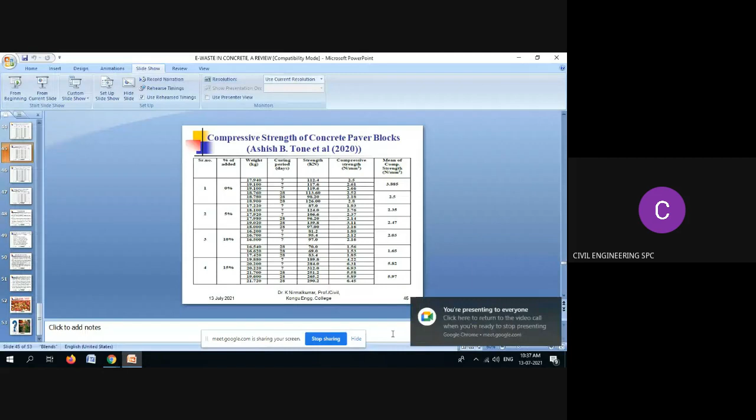So, if we are going for a paver block, we can go for the 15% replacement because more amount of saving, more amount of e-waste can be used. And in places where we want more strength for the paver blocks, even in some industrial areas, they'll have 15 tons or 20 tons of vehicles moving. So in those areas, we can go for the 15% replacement.

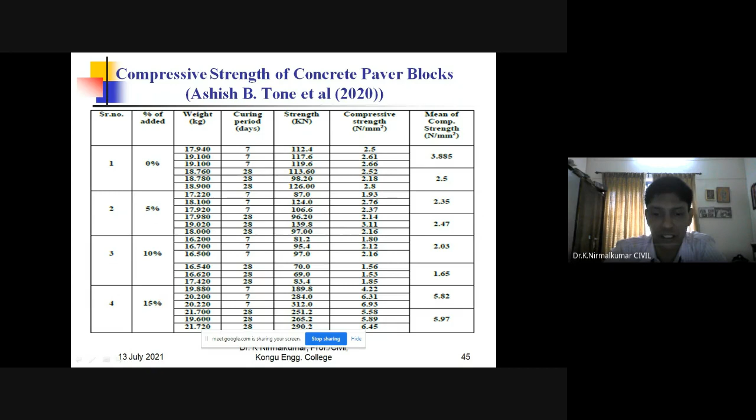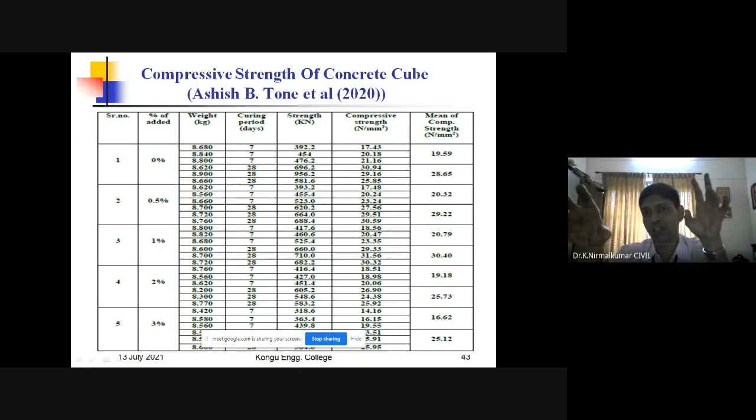And finally, the concrete cube: if you go for 1%, it is the maximum compressive strength. We are obtaining it for 1%, that is 30.40 Newton per mm square. So based on this experiment, we can come to a conclusion that for different bricks or concrete cubes or paver blocks, based on the requirement, we can go for the composition. So these are all the inferences for this study.

So before getting into the conclusion, let me once again recapitulate the experimental work done by the 3-4 people. Still a few people have done the experiments, but their results are not satisfactory for me, so I had not discussed those results. And based on the results, if you want to go further and you have questions, you'll probably be shooting up the questions.

One question may be: why, Nirmal Kumar, in one of them for 15 or 20% you are having good strength, but here for 1 or 0.1% or 2%, 3% you are having a different strength? So once again, my answer is they may have used different material. For example, X may use the television, Y may have used mobile phones, or Z may have used circuit boards, which are very dense in nature. So based on the materials used, there may be some variation.

That is one instance. And the second thing, this is valuable information if you want to carry out research work in the future: please go from the basic fundamentals, starting from the workability, from the compacting factor. Because nowadays, if you want to complete a PhD, you have to publish one or two papers in reputed journals.

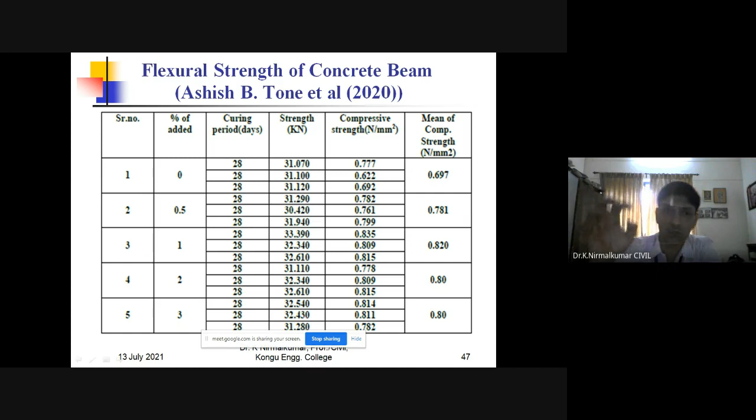So at the outset, let me conclude. The quantum of waste generated over the past several years has posed an increasing threat, and we have to find an alternative to use these things. One alternative is using wastewater in concrete, replacing the potable water. We have to replace fine aggregate or coarse aggregate with e-waste to safeguard the environment. As long as electronic products contain an assortment of toxic chemicals and are designed without a recycling aspect, it's a big threat to the ecology.

Even if you see the aquatic, the sea area: about 3 years back, there was a huge amount of rain in Mumbai. The water was choked, and since a large amount of water had stagnated, it plunged into the sea, forcibly entering at the estuary. After 15 days, it was fully covered with plastics, electronic items, waste items, polythene and papers.

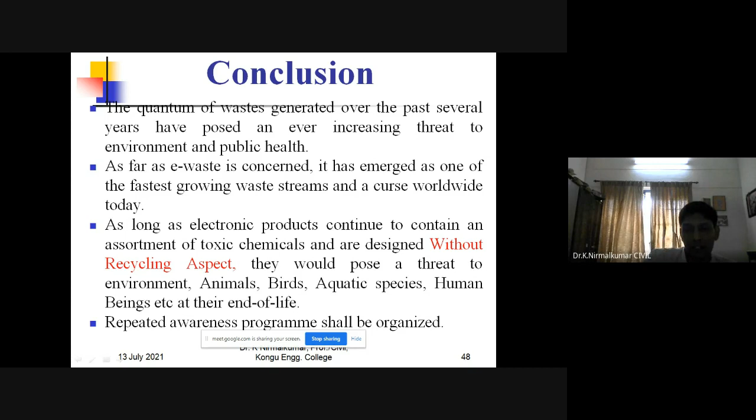Many aquatic species, starting from fishes and squids, died. It is a big threat to the environment. So we have to be very careful in recycling this e-waste. So let me summarize the things we have discussed here.